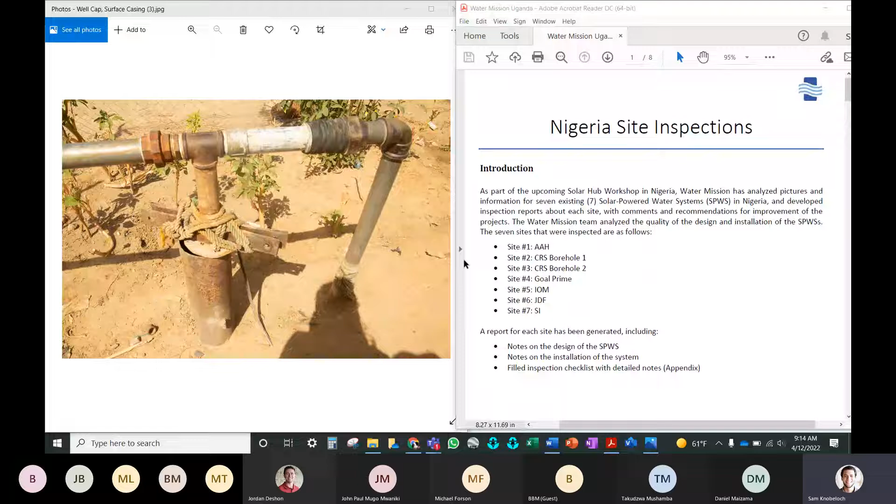Similarly, for doing an assessment by pictures, you can never have too many pictures, but we'll take the pictures that we have and discuss what we see. Please feel free to jump in, to interrupt as I go along. I will not be offended. I would love to hear questions and anything people have to say about what they are seeing.

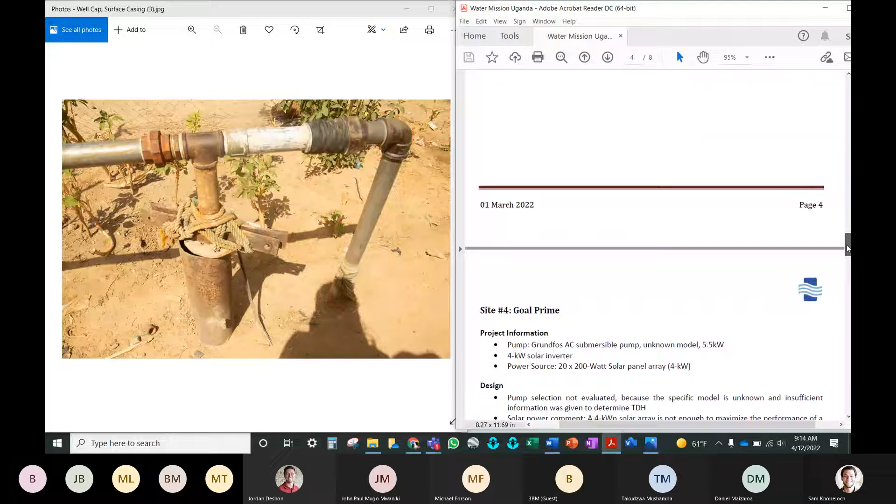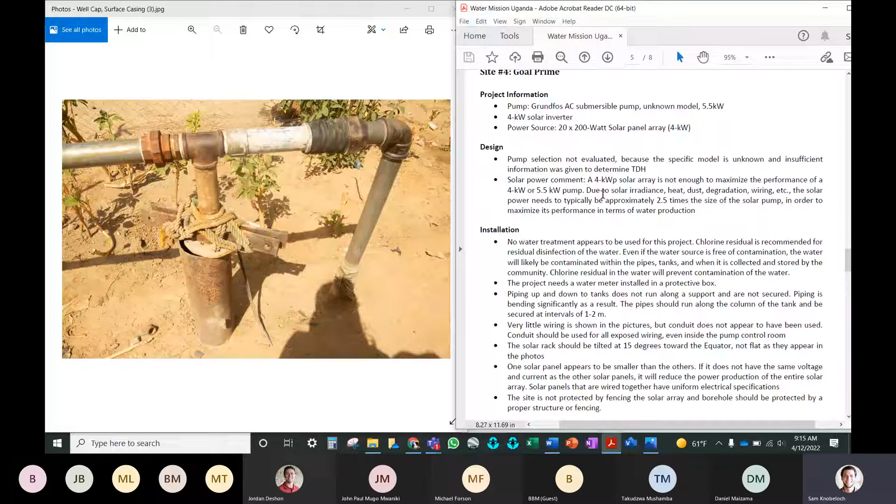So we'll start with site number 4. This is a Goal Prime project. I'll read my notes that I made, and then I'll go through and show you in the pictures. You can see I have my notes here on the right side, and some pictures that I'll go through on the left side of the screen.

The first thing I noticed about this installation is there are no pictures shared of water treatment. So even for water sources of very good quality, it's recommended that

chlorination be done as water treatment. And the reason for this is even if the water is free from contamination in the source, the water will likely be contaminated by pipes, by tanks, or by the people who are collecting the water. Maybe it will touch their hands, their containers. There's no guarantee that everything the water will touch from the time it is extracted to the time it is used will also be clean. In fact, it's likely it will not be clean, and then it can contaminate the water.

But chlorine gives the water a residual protection from contamination, and it's safe to drink, so that if the water touches dirty hands, it will still have some amount of protection to make it safe to drink. So Water Mission recommends chlorination as disinfection and residual for all water system installations to ensure that safety.

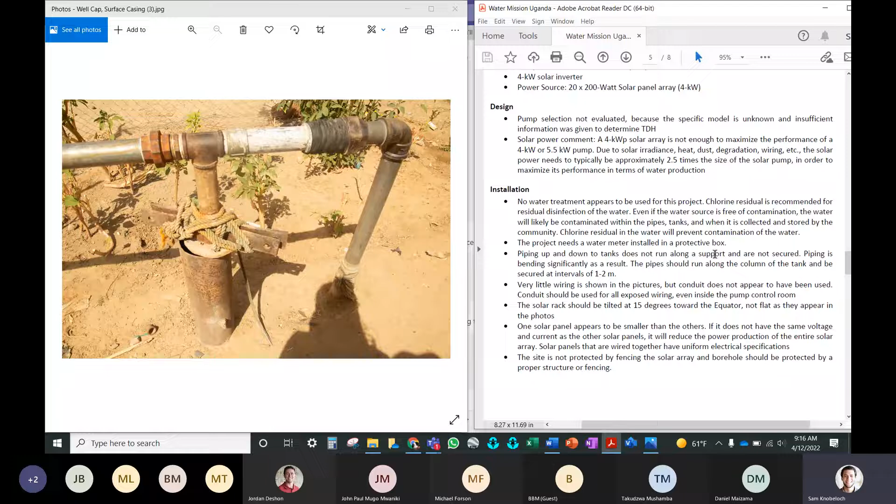This is also a common standard in municipal water systems all across the world for public water to have that residual, some kind of protection from contamination.

So now let's look at the borehole. This is the borehole. You can see the well is here, and the pipe comes up out of the borehole there. So some comments I have for this installation: number one, there should be a water meter installed on the project. It doesn't have to be installed at the borehole. Maybe there's a pump house or near the tank, but a water meter should be installed on the project and be in a protective box.

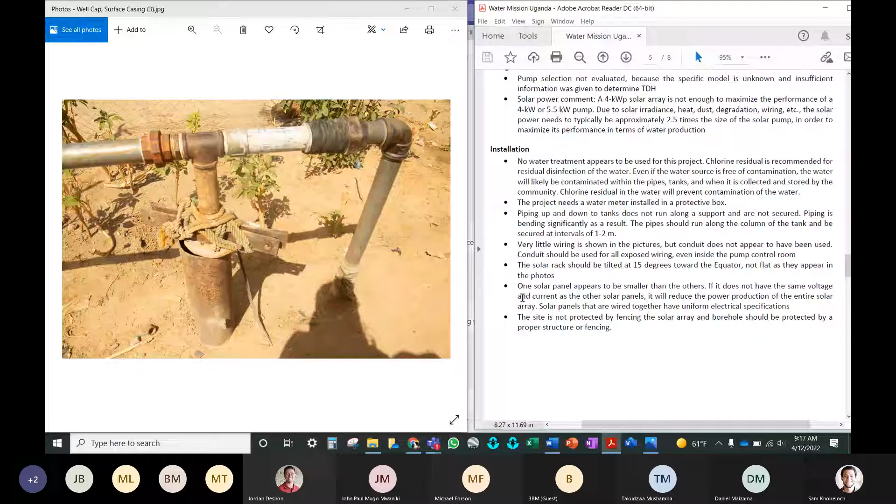Let's go to some more photos. Here we go.

Let's look at the tank tower. One thing I noticed is the piping is not adequately secured. The piping up and down to the tanks does not run along a support and is not strapped to anything. The ideal installation for suspended piping is that it would be against a wall or a tank column or against the tank to provide support, especially if it's plastic piping.

And then it should be strapped with pipe straps or something else to secure it. This would protect it for the long term and give it more durability.

The second thing I would recommend is having some kind of fence around the tank structure. This will reduce the risk of accidental damage to the piping or anything else. It can also prevent children from being able to climb on things where they would also not be safe.

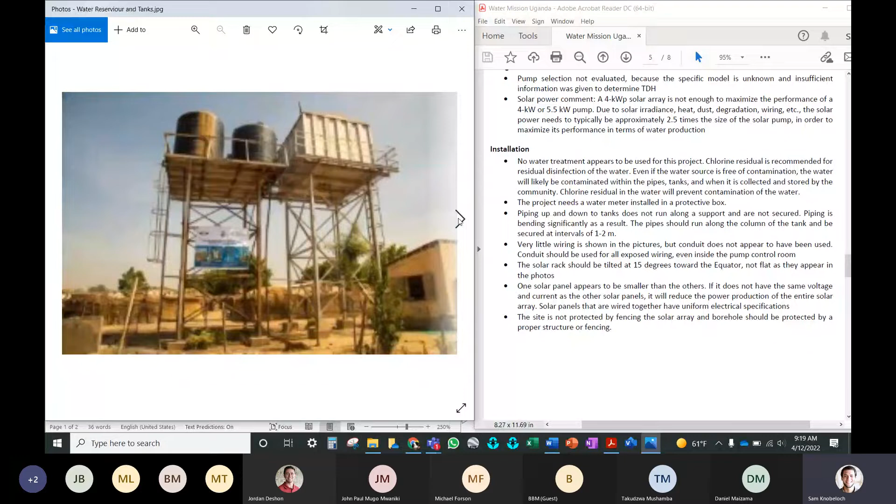Another comment I had about the piping going to the tanks: for the inlet to the tanks, the piping comes up and divides and branches to go to both tanks. The way I would advise this to be done is along the base of the tank tower. The inlet pipe could divide here, branch, and go to the base, then run up the tanks into the inlet - that would also be more secure for the pipe. Basically, the goal is to limit the amount of suspended pipe that is not secured to something or running along some kind of support. The less you have of that, the more secure your pipe system is going to be, and the more you reduce the risk of damage.

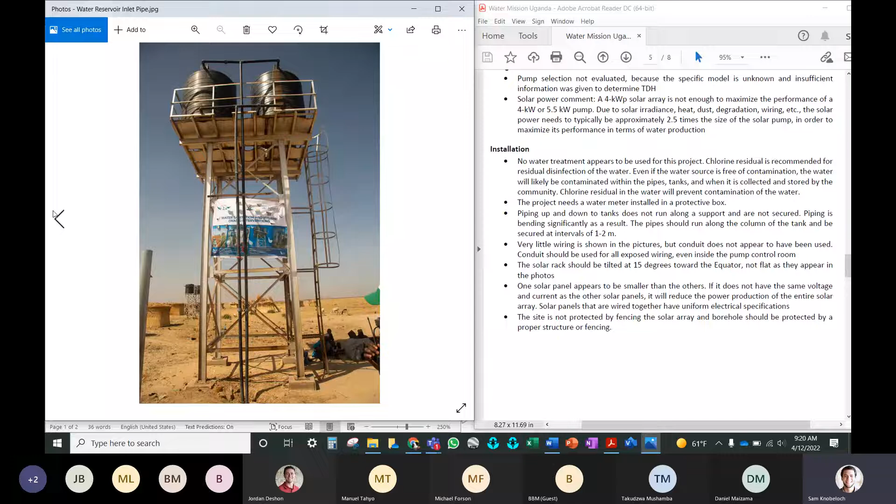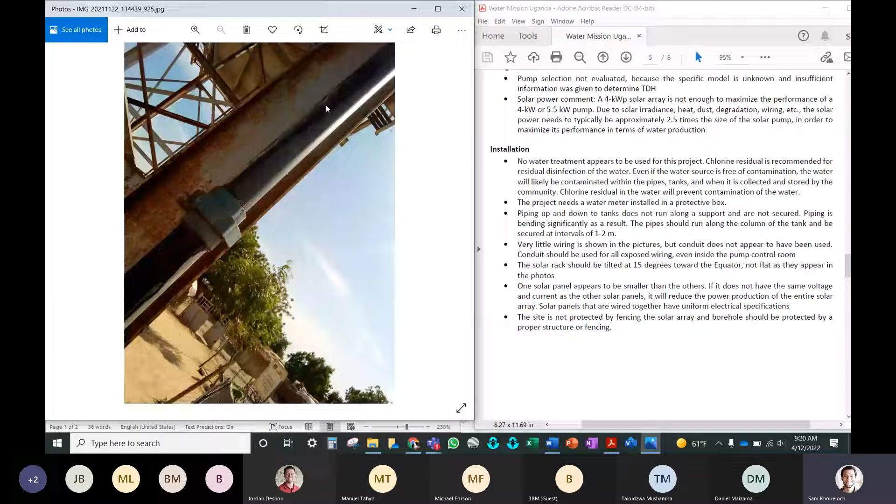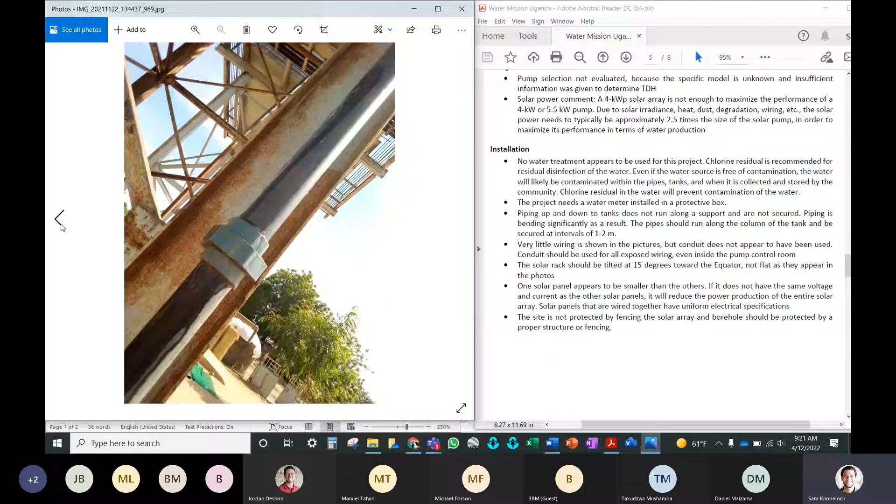Let's look at the solar power and the wiring for the system. You can see here's an example where the pipes do run along a support. That is actually recommended for all the piping, as much as possible, to run along those supports. Even if it requires a few extra elbows, fittings, or additional length of pipe, it's worth it for the protection of the pipe.

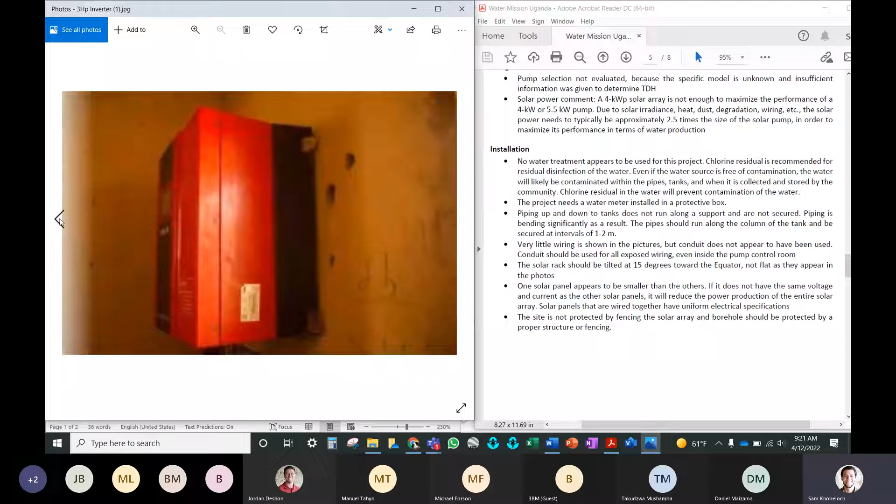Okay, so here we go. I'll go back to the beginning. One thing you can see in these pictures is that the solar array is completely flat.

There are two things to consider when determining the tilt angle of a solar array. One is the location of the project, specifically the latitude, and what will give it the best direct sunlight. So if you are 3 degrees north of the equator, you may want to consider facing the solar array south by 3 degrees to get the most direct sunlight. However, the minimum tilt angle for a solar array that Water Mission recommends is 15 degrees, and the reason for that is for cleaning.

If the solar array is tilted, when there's rainfall, the rain can wash dust off of the solar panels and help them stay clean. If the solar panels are completely flat, despite the fact that that might be a little more efficient for capturing solar power, it can also capture water. Rainwater can pond on top of the array, or it won't wash any dust away because it's too flat. So Water Mission recommends at least a 15-degree tilt.

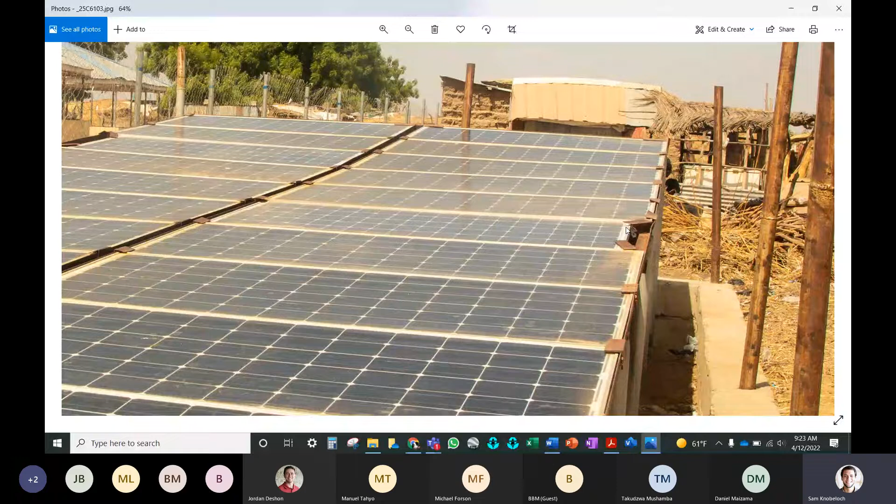Another thing I've noticed about this solar array - I'm gonna zoom in a little bit - is there's one solar panel that is different from the other solar panels. You can see this one is smaller in size, so that indicates it's probably a different model and probably a different amount of power. The reason this is a concern - well, first of all, the details of this specific solar panel weren't shared, so I'm not 100% sure what the electrical specifications are, but it's very important that the solar panels installed and wired together have the same electrical specifications.

If solar panels are wired together in series, they all have to run on the same electrical current. So if you have one large solar panel wired in series with a small solar panel, both solar panels will run with a low current because they have to operate with the same current. If you have 10 large-current solar panels installed in a string with one single small solar panel, it will cause all 11 solar panels to operate with a small current because they all have to match each other's current.

It's the same with voltage. When solar panels are installed in parallel, they will all operate on the low voltage. So basically, you want to avoid having solar panels of different electrical specifications because it will reduce the efficiency of your array. The larger solar panels will be operating at a low amount of power, and you won't get as much solar power from your array.

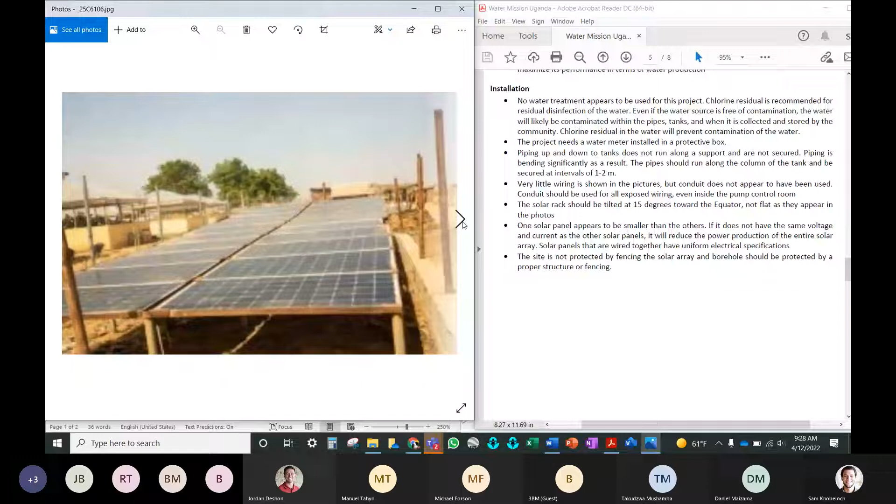So this is the pump control room, or this is the inverter. It appears to be installed in the pump control room. So one thing that would be great to see is pictures of the entire pump control room, so all the wiring can be seen, everything that's installed inside this room can be seen. And then we can analyze that.

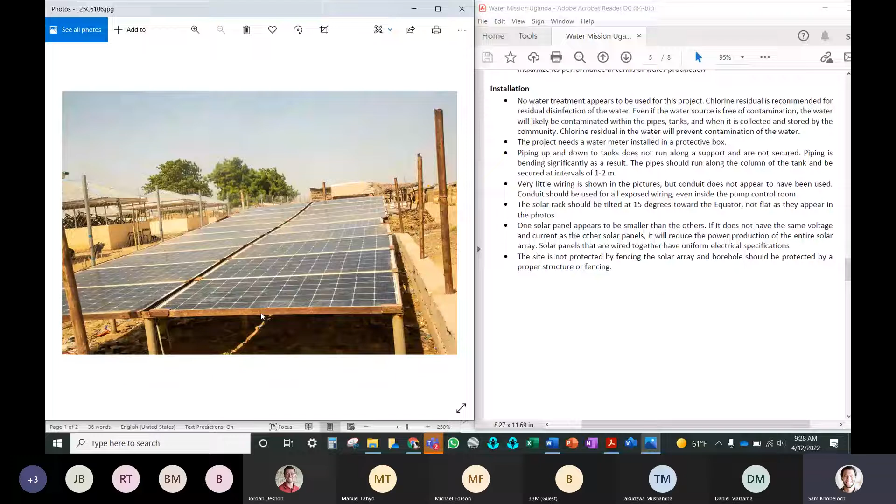But one thing I'm getting from these pictures is, although you can't see much wiring, it doesn't appear to be installed in conduit. Also, even if you go back to the solar rack, you can see some wiring here. So Water Mission recommends that all pump cable, all solar cable be installed in conduit, and the conduit should be secured to a support or secured to the wall, something like that.

This protects from water damage, it protects from insects, it protects from someone tampering with the wiring. And it helps keep people safe, especially those who may not know much about electrical power and how to stay safe around it. So it protects the equipment as well.

Even when electrical equipment is installed inside a room, it's best to protect with conduit as much as possible.

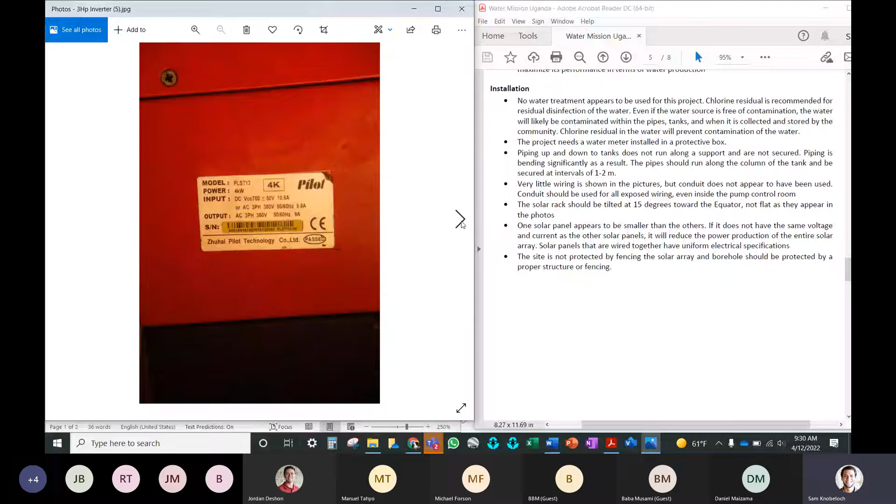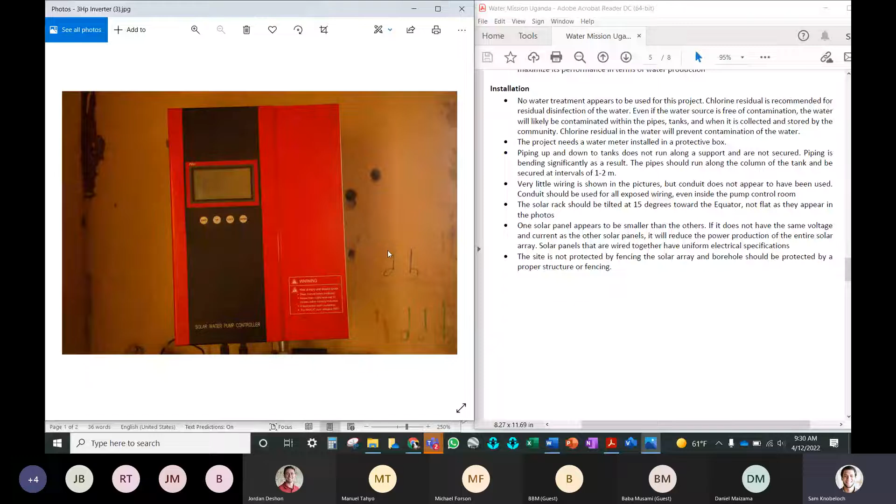Another comment I'll make is it is recommended that an electrical room like this be used for installing all of the electrical controls on a water system. It protects from water, insects, all that. It keeps the equipment protected, and the more protected the equipment is, the longer it will last. And hopefully by the end, we'll get an opportunity to look at some installations that show the full recommendation for protecting electrical equipment that we make.

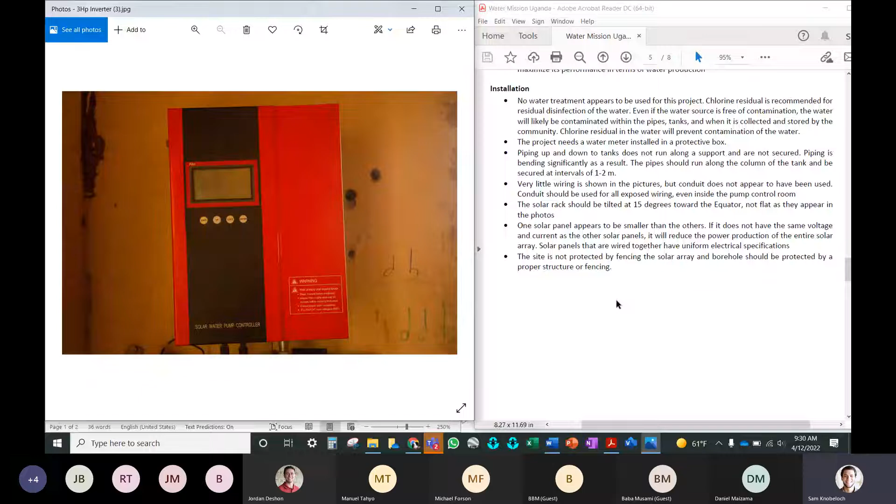So next, I want to move on to another project and look at more pictures. But before I move on, does anybody have any questions or comments they would like to share? There is one question in the chat box. Can you see it, please?

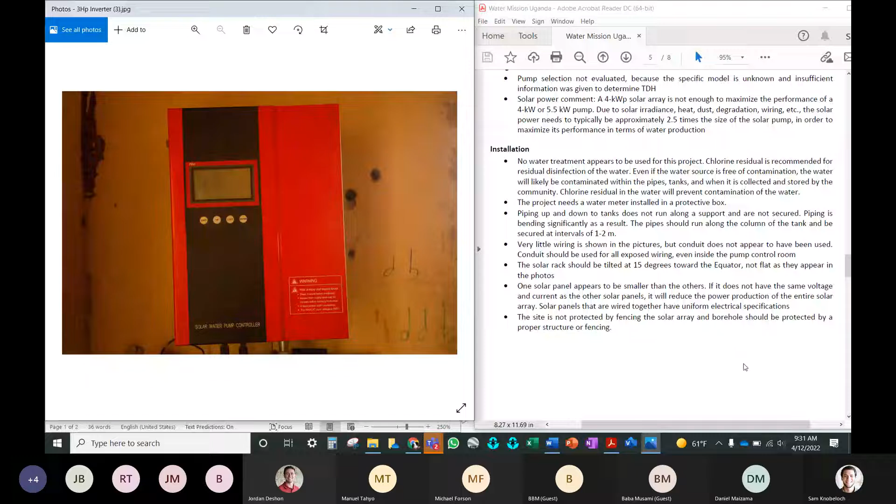Yes. So, will the fence posts cast a shadow on the solar panels? It's a great question, Jordan. Let's take a look at the solar panels. Yes, so depending on the time of day, it looks like it's quite possible that these fence posts would cast a shadow on the solar panels. I don't know which direction the sun is rising from.

It looks like there's a slight tilt to this. At the back, it looks raised, and at the front, it looks lower. So let's assume that this is the south side of the solar array, so that would be the ideal direction to tilt the solar array. Then in the morning, as the sun rises in the east, that would be the right side of the picture. These poles could shade the solar panels, and in the evening, as the sun is setting in the west, these poles could shade the panels, and that would cause reduced production.

So I think it is likely the sun is very high in the sky, so during the day I wouldn't expect the north and south poles to shade, but regardless, anytime a solar panel installation is done, it should be clear from any possible shading obstruction. Trees, other structures, fencing, all that should be constructed in a way that it does not shade the solar panels. And during installation, it should be observed while things are being constructed. You should observe to make sure that no shadows are being cast. Tree branches can be trimmed, but if structures cannot be trimmed or moved, that needs to be adequately planned.

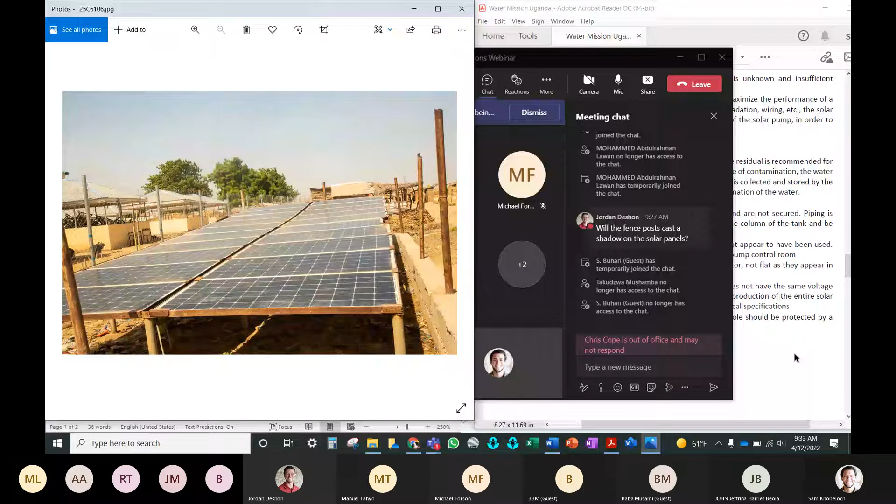Hello? Yes. Yeah, for example, like this one has one of the solar panels different. Yes, assuming all the solars are mono and then you got a replacement of poly, is it okay?

That's a great question. I'm not extremely familiar with all the differences between mono and polycrystalline. One difference I know is that I believe monocrystalline is less prone to deterioration over time. But I'm not extremely familiar with the difference. The most important thing is that the current and the voltage of the panels be matched or very similar. But I would have to get back to you on whether it really matters if it's mono or polycrystalline. Jordan or Daniel, do you have any, or Manuel, do you have any insight for that?

No, I think we can try to investigate and then respond back with that question. Great, yeah, we'll make a note of that.

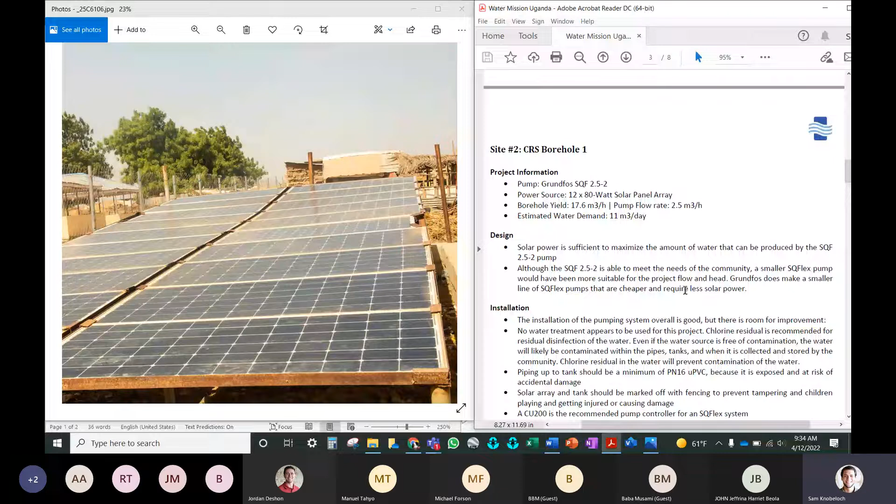Absolutely. Okay, so let's move on to the next site I want to talk about. This is a CRS project, called CRS Borehole 2. Let me pull up my notes and the pictures for this project.

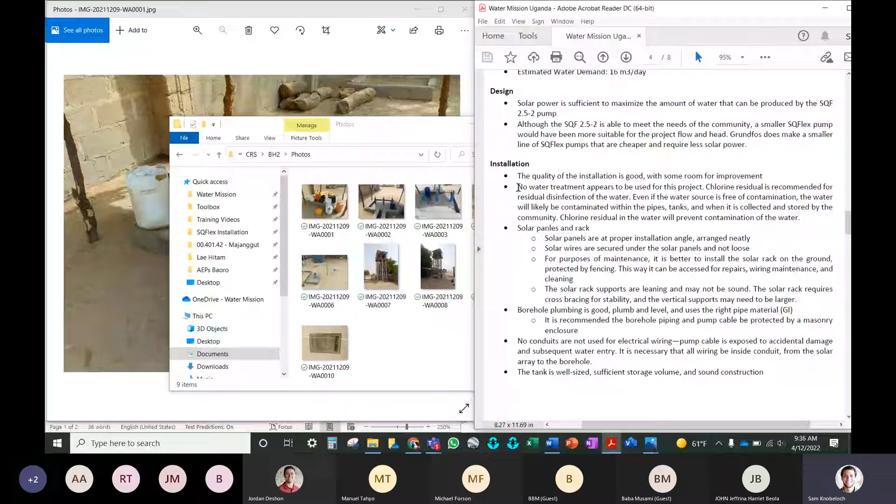Okay, so the overall quality of this installation was good, but there are some areas for improvement, so we'll talk about that. The first comment, at least based on the pictures shared, is that there was no water treatment installed on this project. Often borehole water quality is very good, but we always recommend some form of residual prevention from contamination, and chlorine is the simplest, easily accessed solution for that.

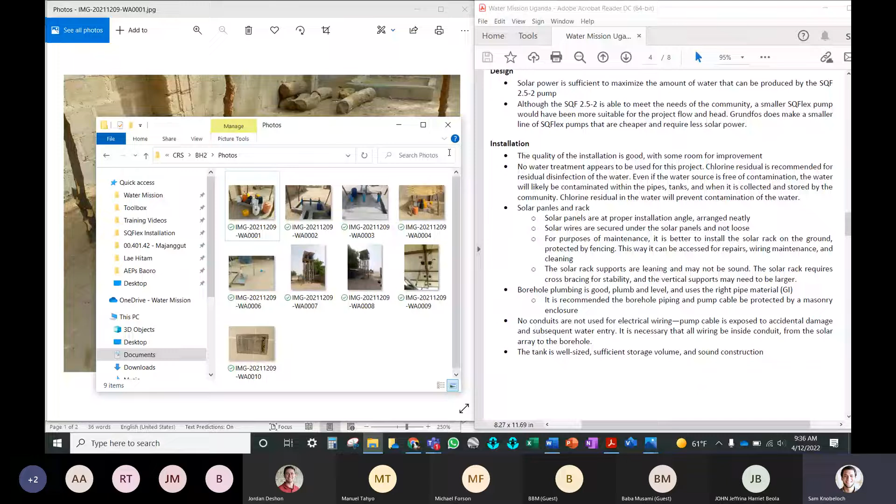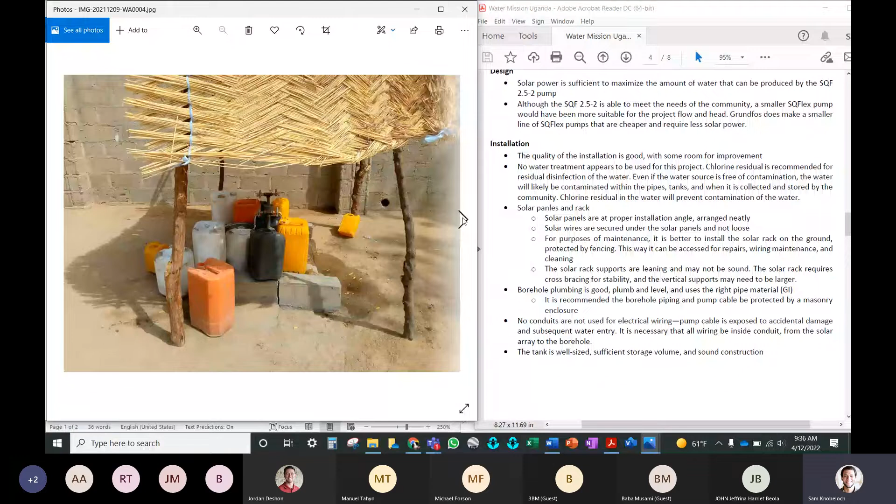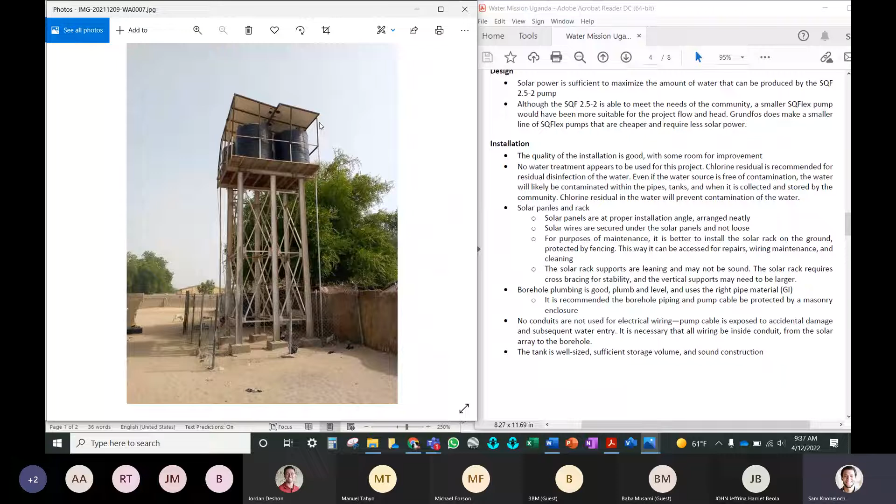Let's open up some pictures. First thing I'll talk about is the solar installation. As you can see, the solar panels are at a proper angle of installation. It's hard to know the exact angle, but it may be a little too shallow for good cleaning by rainfall.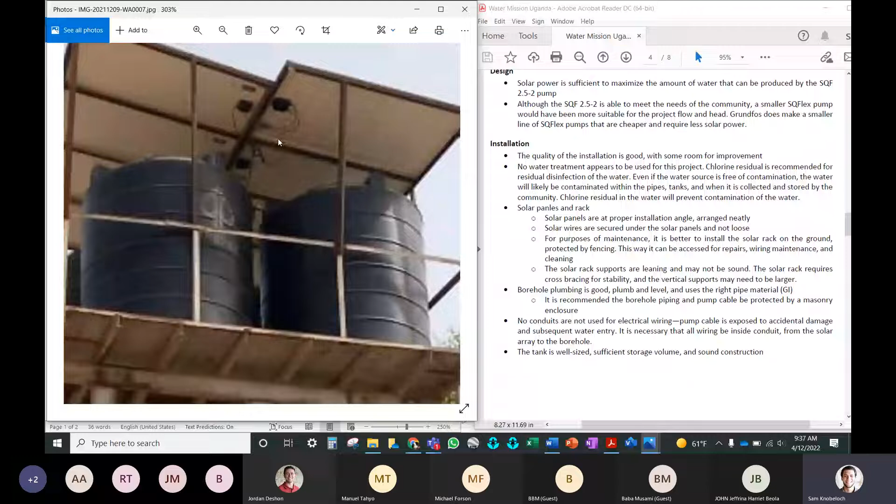Another thing we see here is that the wiring for the solar panels is secured neatly underneath the panels. They're not hanging loose, which is good. I know I talked about all wiring being inside conduit - that excludes the solar wiring immediately under the panels. When you have these solar panels wired individually, the best thing to do is tie them with zip ties or cable ties, keeping them secure to the bottom of the rack. Then when they come together, or begin to run toward the electrical room, they should enter conduit before coming out from under the solar rack. So the conduit should start from underneath the solar rack and run wherever it needs to go.

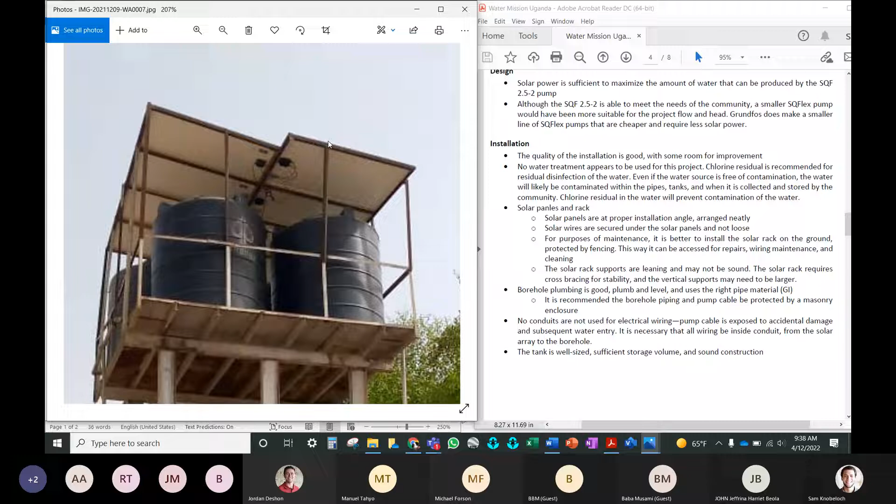Some areas of improvement for the solar rack: number one, the supports - you can see they're not all perfectly straight. They're welded off the railing from the tank support, so the supports don't look perfectly stable or quite stable. The most important way to improve the solar rack support structurally would be to add cross bracing in between all these vertical supports. That would make the rack much more secure and structurally sound. Wind blowing can cause it to sway, and cross bracing would prevent that swaying.

The cross-bracing may be sufficient to make it secure, but I also might prefer having larger vertical members for these solar arrays. The best thing would be, if it's going to be on top of the tower, for the vertical support to go from the solar rack down to the tower base rather than being connected to the railing, just to make it sound.

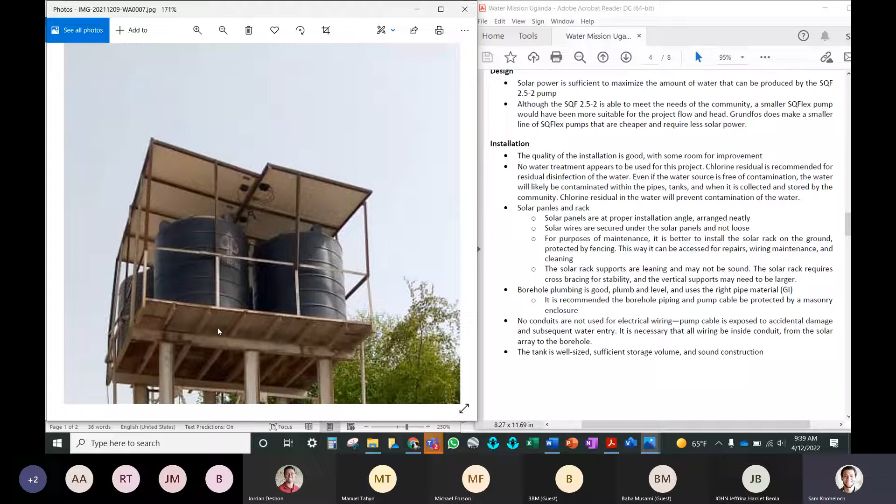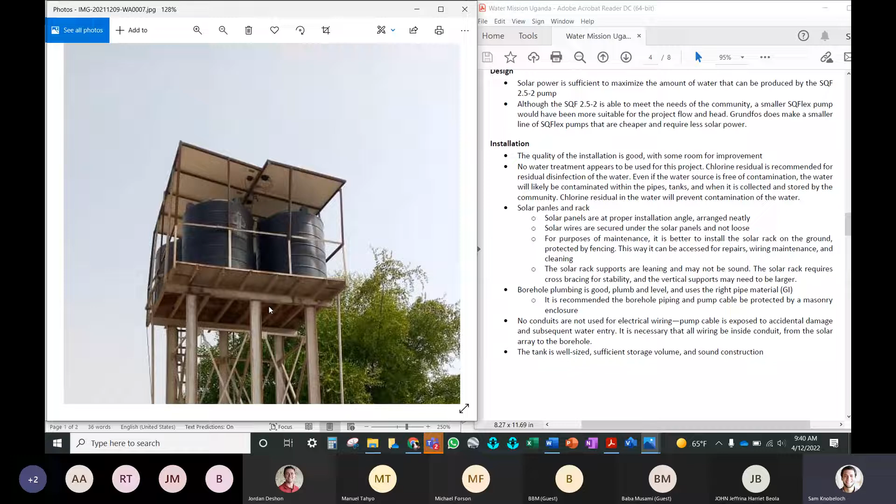The other comment I would have is that it's best to install solar racks on the ground or on the roof of a structure where they can be easily accessed. Because these are installed up high, even if someone comes up to the tank platform, it is still very tall for them to access. Also, the tanks may prevent access to fix wiring or do any kind of repairs or maintenance, and especially cleaning.

Imagine being the person who has to go up and clean the solar panels on top of this tower - there's really no place to stand, no place to put a ladder at the base to get up there. That's why it'd be preferred to install on the ground or on the roof of something where it's safe to stand or put a ladder to easily access the solar panels. So that's something to consider: can my solar panels be safely accessed for cleaning and repairs in my installation? You can use your best judgment for that as well.

So those are my comments on the electrical installation. Let me talk more about conduit - let me see if I can find a good picture for that.

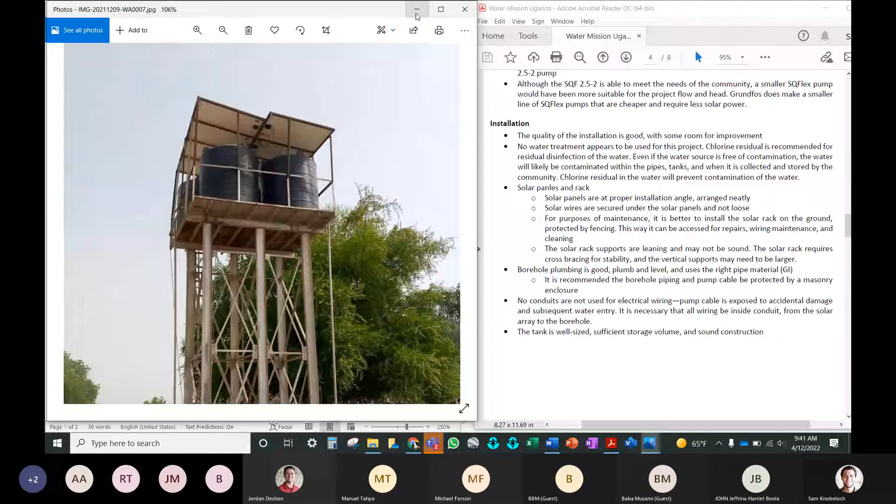So this is the borehole. As you can see, the electrical wire is not protected in any kind of conduit.

Again, we recommend that conduit be installed, and ideally you would have a structure around the borehole. If there's any plastic pipe or plastic conduit or wiring exposed, a small masonry structure can be constructed around the borehole to protect that wiring, the conduit, the plastic pipe.

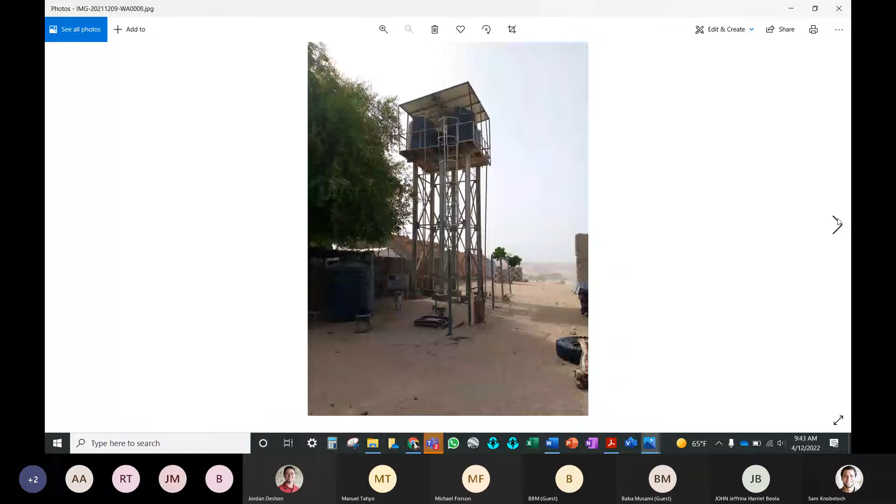I think, let's see if there's a close picture of it. So as you can see, the pipes running up and down from the tank are also suspended, not secured to a support. Ideally, it would be secured to a support.

I've seen where the pipe is strapped to the vertical support of a tank tower, and then a hole is made in the platform so the pipe can come up and go to the tanks rather than doing elbows over to the outside, but both are acceptable. The key is to have the pipes strapped along supports for durability.

And it also appears that this is the pump cable coming down from the solar panels. There you can see a small cable here, this thin line looks like the pump cable. It's very important that it be strapped in conduit, and then that conduit be strapped to a vertical support.

So the key thing to remember is that all wiring should be in conduit and not exposed to damage by animals, by insects, by lizards, or by any other accident that may happen.

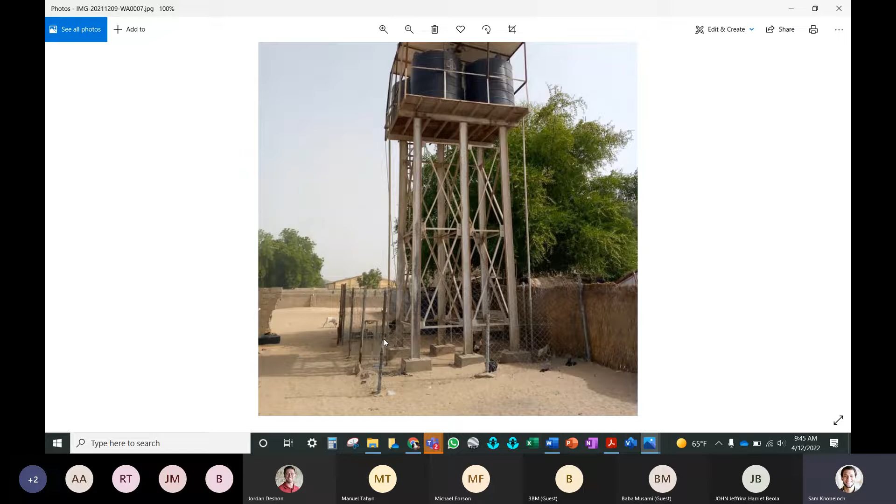Let's see, some positives. The water system is installed within fencing, which is good to protect the project, and borehole piping is very straight. The horizontal runs are level and the vertical runs are plumb, and we have straight 90-degree turns. Those are all good things.

The use of metal piping when it's exposed is good. So it looks generally, it has a look of neatness to it, although there is some exposed cable.

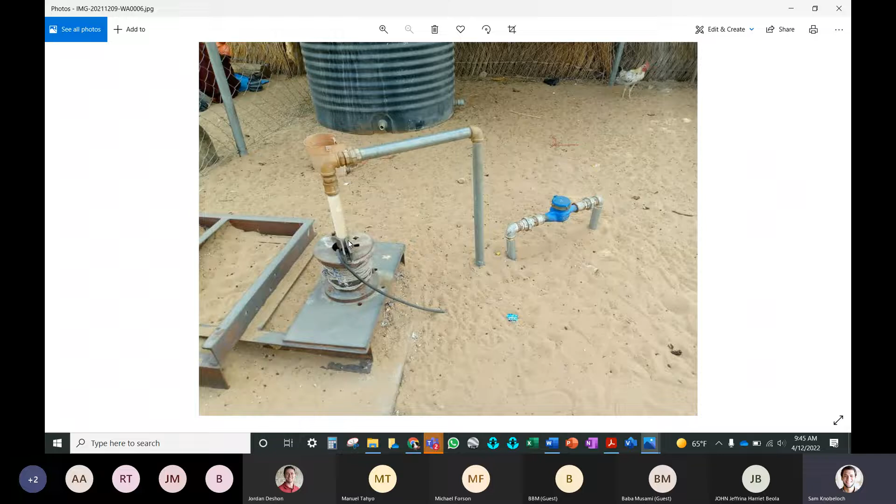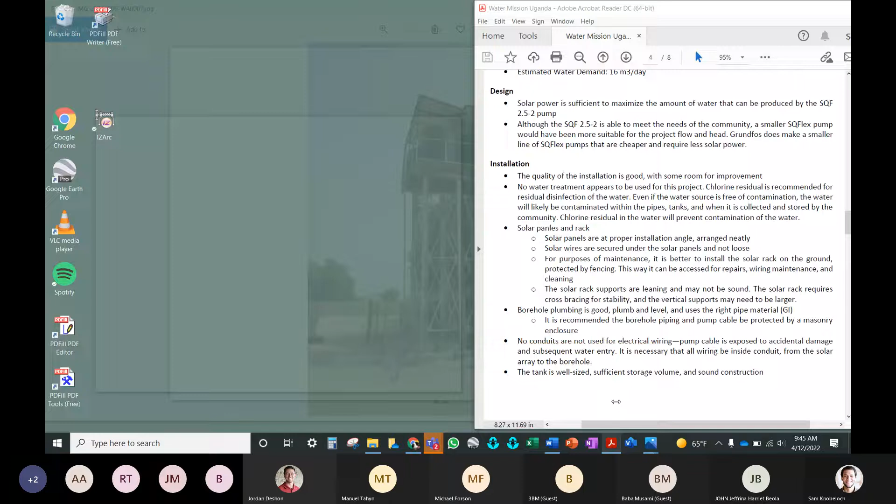Any comments about this system or any questions? One thing I'll say is we haven't seen, this project doesn't show where the pump control switch is. So that is something, I'm not sure where that is and how the wiring is done there, but we'll look at some other examples to talk about that.

Okay, so I'll move on to the next water system. We have about 15 minutes, so maybe we can do one more water system, and then we try to get through that quickly. And then if there's time, we can look at a Water Mission installation and talk about some things as well.

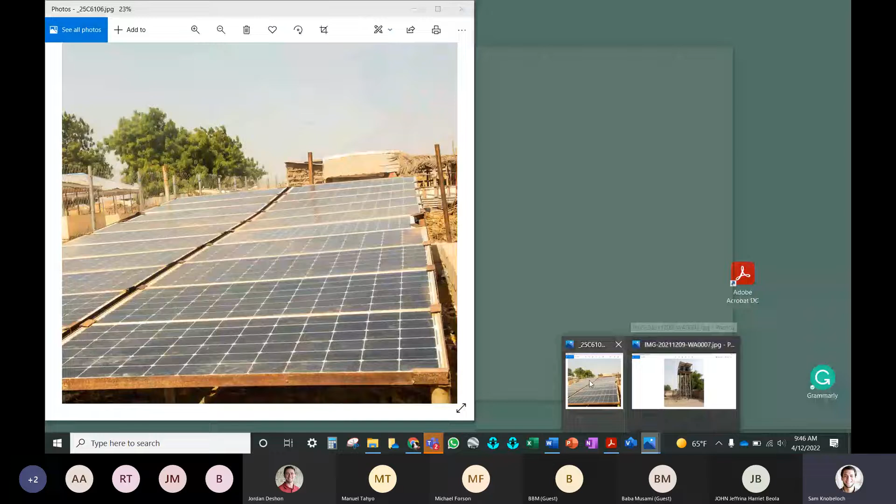So let's see. The next borehole I want to show is CRS Borehole 1. Photos.

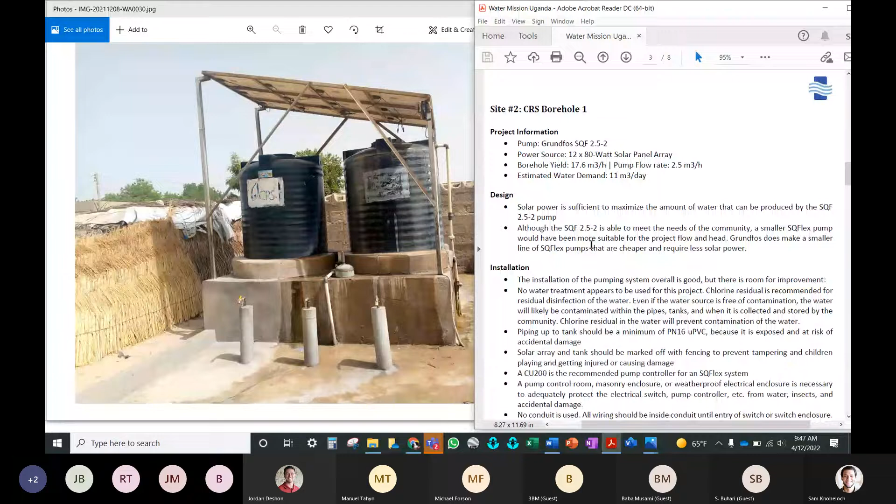So again, another comment is about water treatment. I didn't see any water treatment for this project either. But we've discussed that.

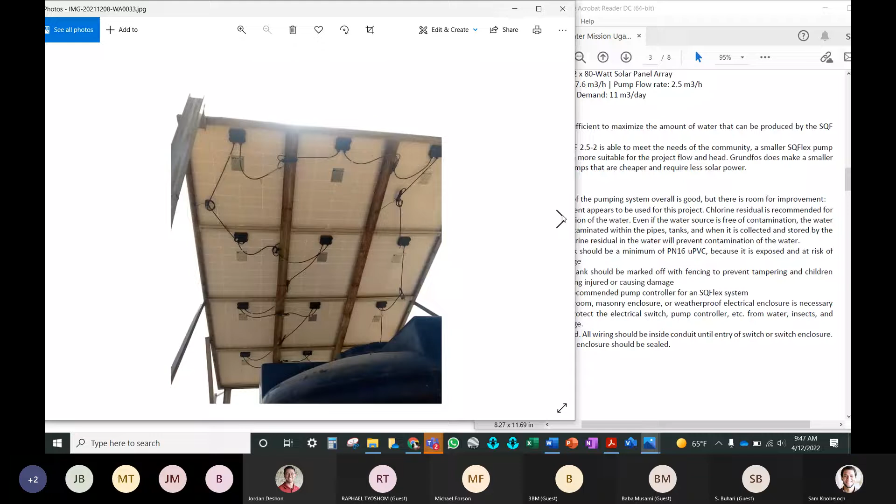So this is the project. This is where most of the components of the solar powered water system are contained. And I think this is the location of the borehole there.

So we'll talk about the electrical installation first.

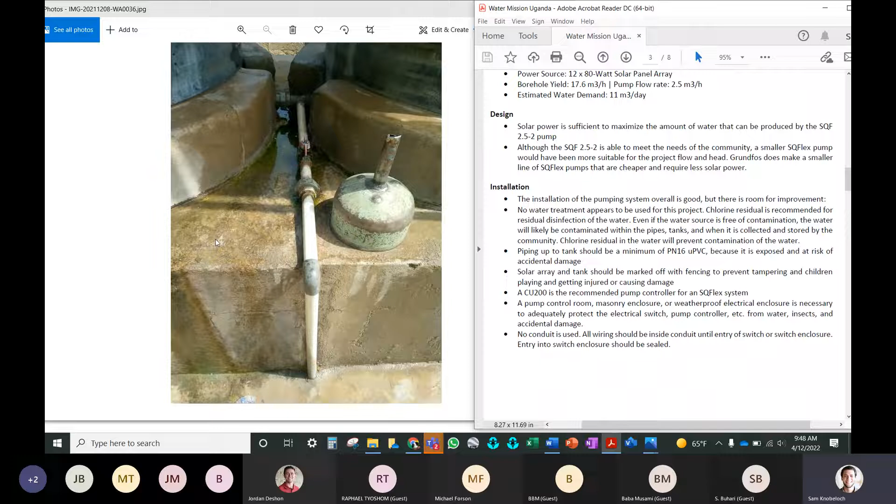Some good things. You can see again, the wiring is secure underneath the solar panels. But once it is wired together, it should go into conduit.

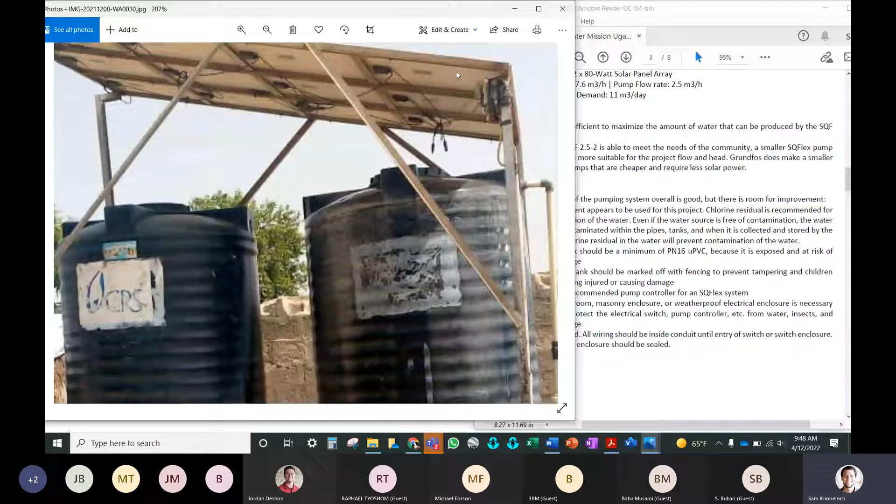The solar rack has cross bracing, and it is at the footing. It is encased in concrete, so it has more stability than the previous solar rack because of the cross bracing and the way it is tied into the ground here with concrete.

Ideally, this area, it was hard to see, but this area should be fenced in so that people cannot just access the solar array, the wiring, the switch. All this is exposed, and you can see there are taps here. So I'm assuming this area is open to the public, which means the solar component and the tanks ought to be fenced off just to keep things protected.

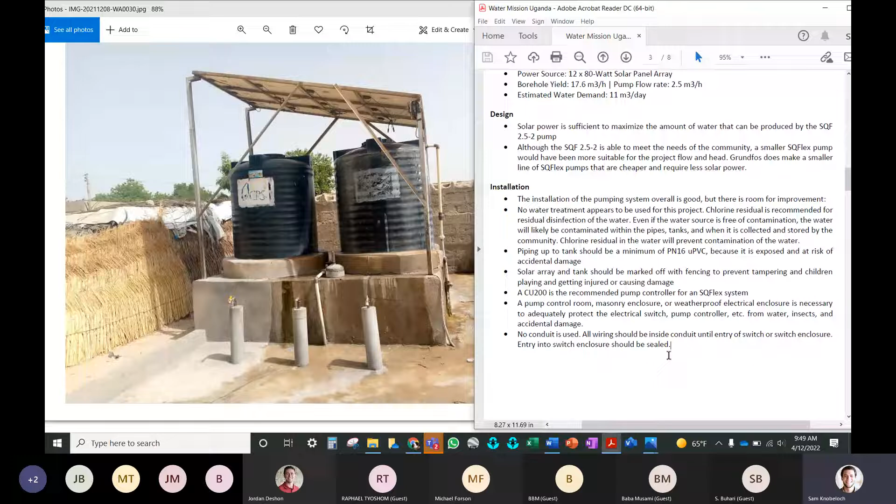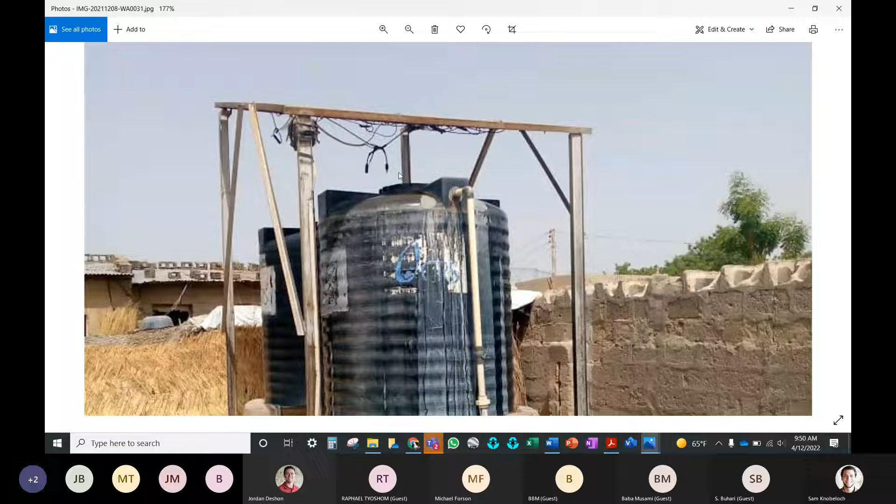So let's look at the electrical switch. Actually, from this angle, you can see that this might be a wire splice or something. You can see where it's hanging down a little bit. So ideally, that could be improved, more secured.

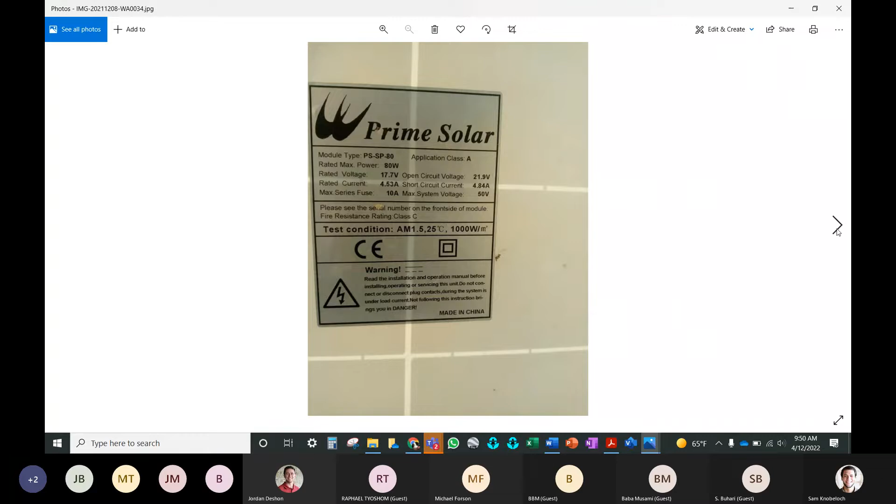Okay, so here's the power switch for the pump. The best way to install the power switch would be inside some kind of electrical room or a small masonry enclosure with a door so that it is protected from outside damage.

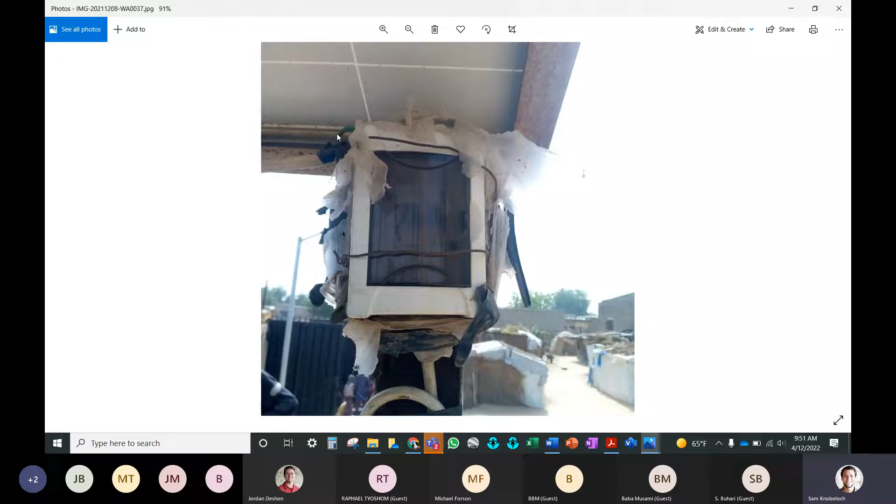A rock could hit this, or over time it's exposed to the weather. I'm not sure if it's sealed from water, so when rain hits the outside, moisture could enter. There's no conduit going into the entry, so it doesn't appear sealed. You can see an exposed wire here. The copper isn't exposed, which would really be a concern, but even this opens up the system to potential damage.

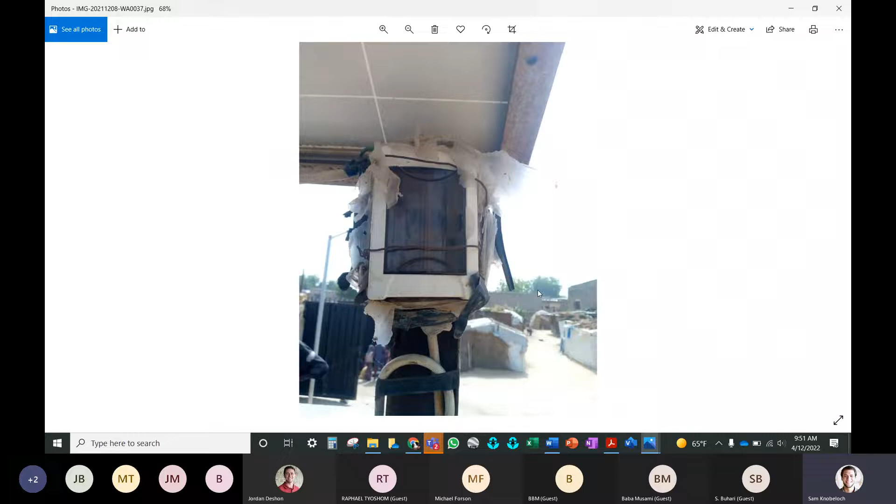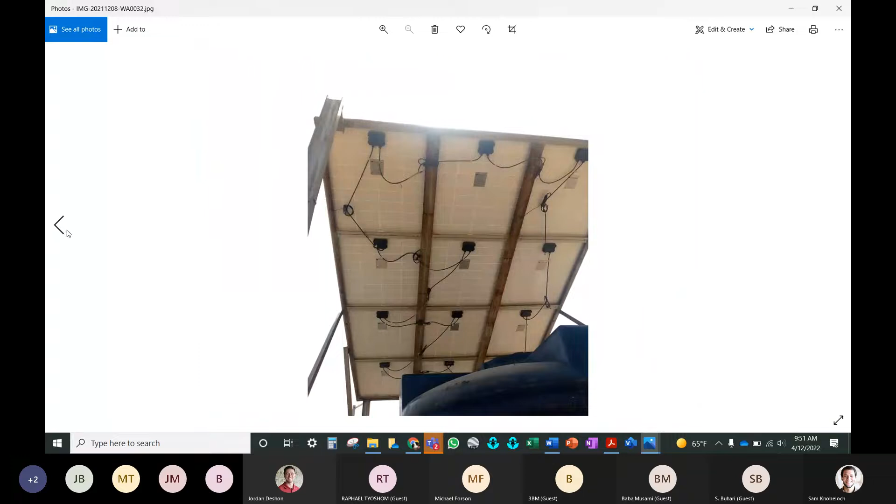All wire splices and wire connections - let's see where we can see that connection. It looks like this connection may be a splice or something. All wire splices or any kind of connection should be protected somehow.

Not with just electrical tape or even just heat shrink, but it's best for it to also be inside conduit, and even inside the electrical control room.

Of course, if wires are joined at the solar array, then at the very least they should be inside conduit and done with a waterproof splice, either by a proper heat shrink seal, or there's also what is called a waterproof splice kit, where an outer coating seals the splice after it's made so water cannot enter. And then that should be protected inside conduit.

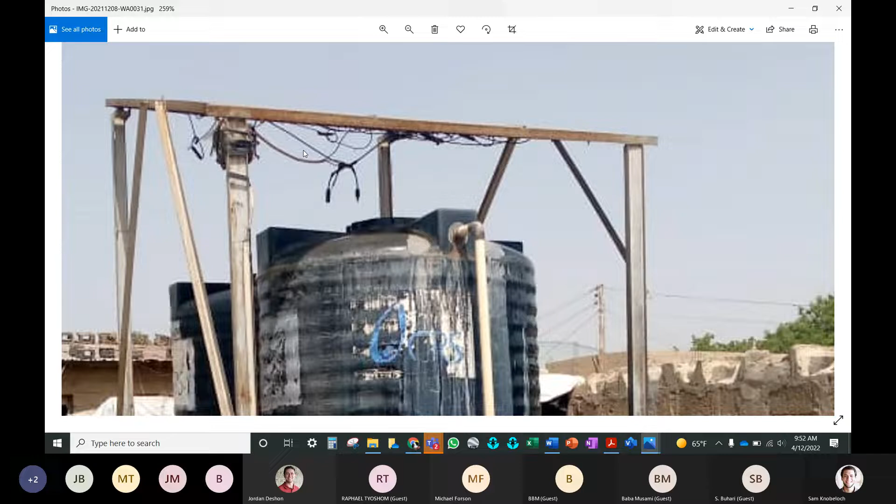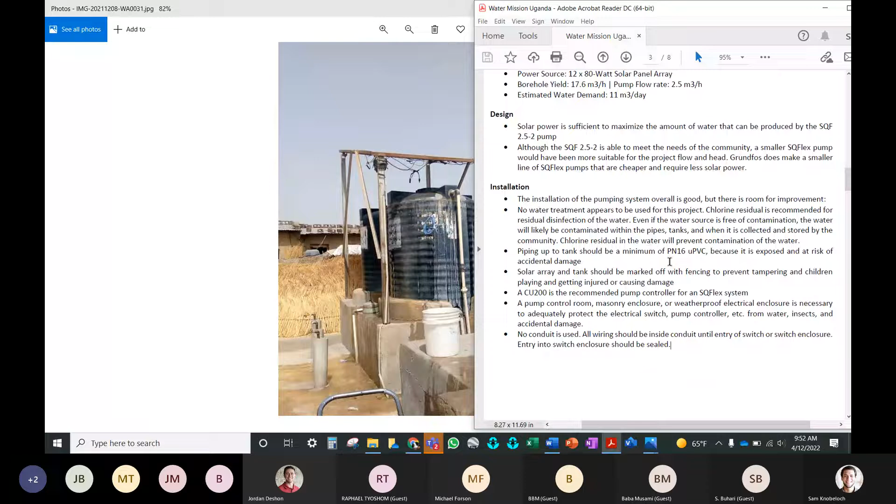The recommended switch for this project, a Grundfos SQ Flex pump, would be the CU200. Water Mission recommends that all standard SQ Flex pumps be installed with the CU200. It gives a lot of information about the way the pump is running.

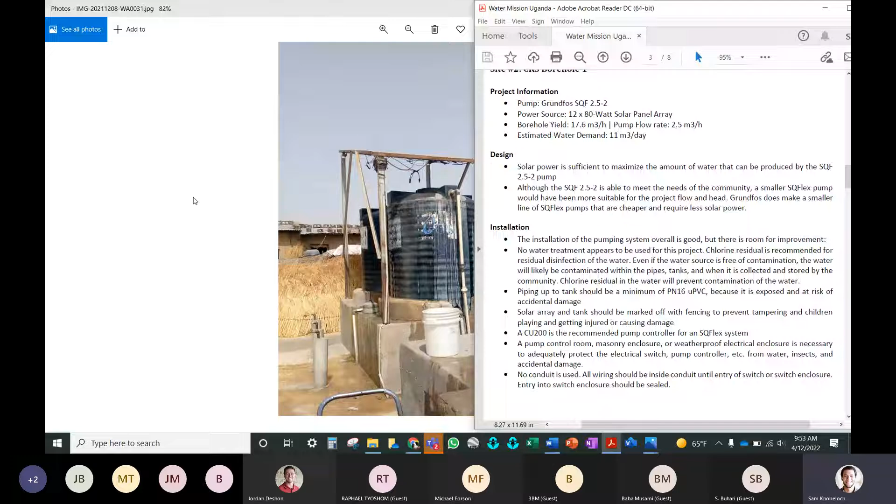So it's better than just controlling with an on-off switch. You can install a tank level switch, see error codes if the pump shuts off, and various things like that. It's relatively inexpensive compared to the cost of the pump - maybe about 10% of the cost of an SQ Flex pump. So for an additional 10%, you get a lot of value.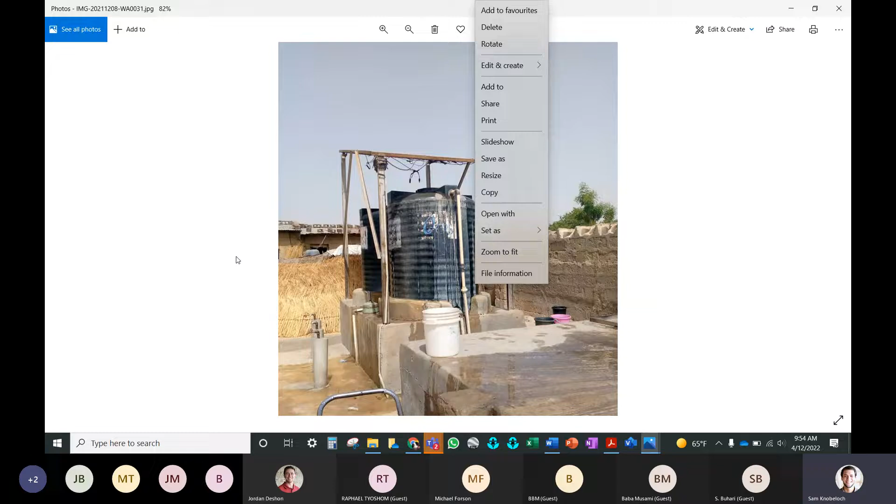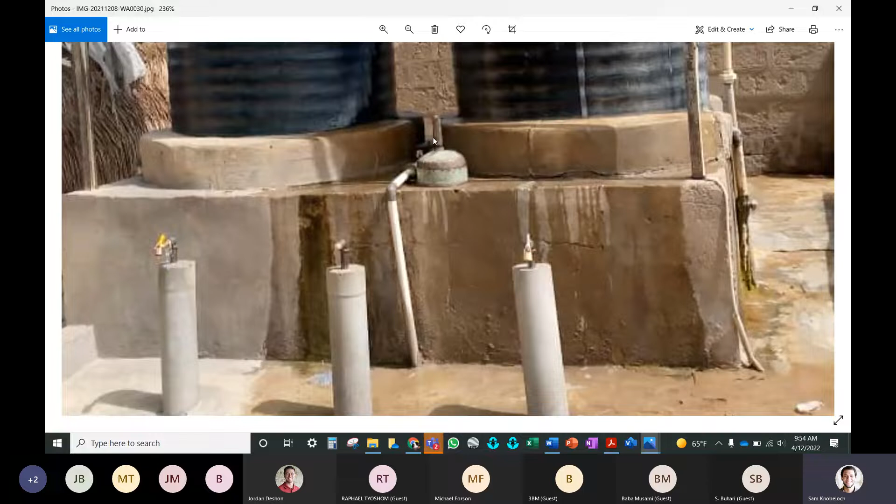Then finally, the piping. You can see some good things about the piping - almost all of it runs along something to help it be secure and not just open and unsupported. You can see here it runs along the side of the tank wall before it enters. Here, the piping runs up the tank, up the wall, across the floor of the base, and up this support. That is good.

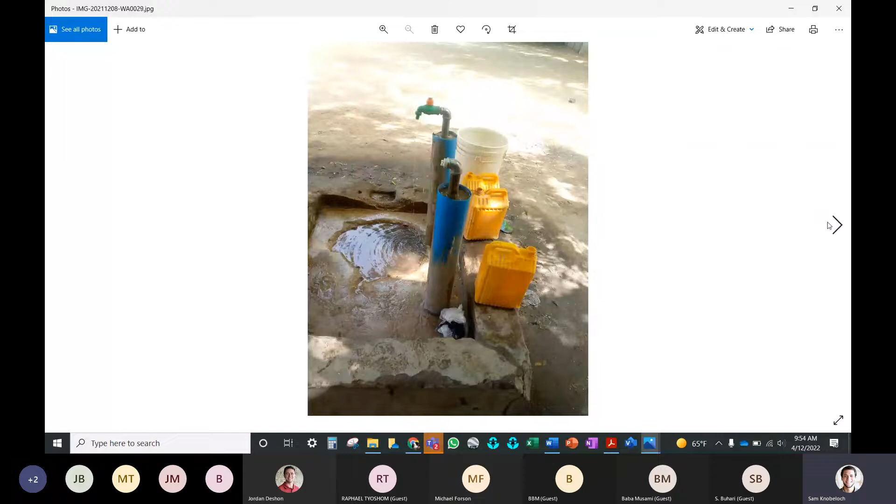The way I would improve that is to add pipe straps. I wouldn't add pipe straps to the tank itself - you don't want to make a hole in the tank - but add pipe straps where it is against the concrete. And then also the valves - we recommend the valves be installed in a valve box to prevent them from damage that would cause leaks.

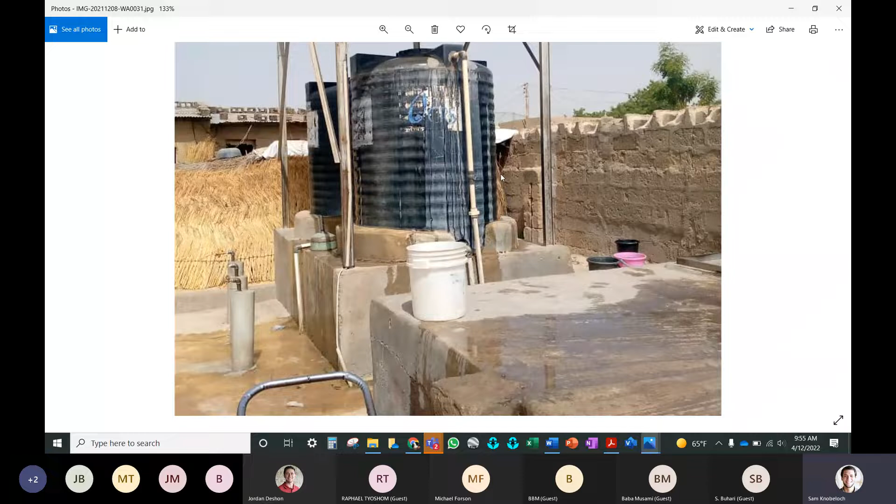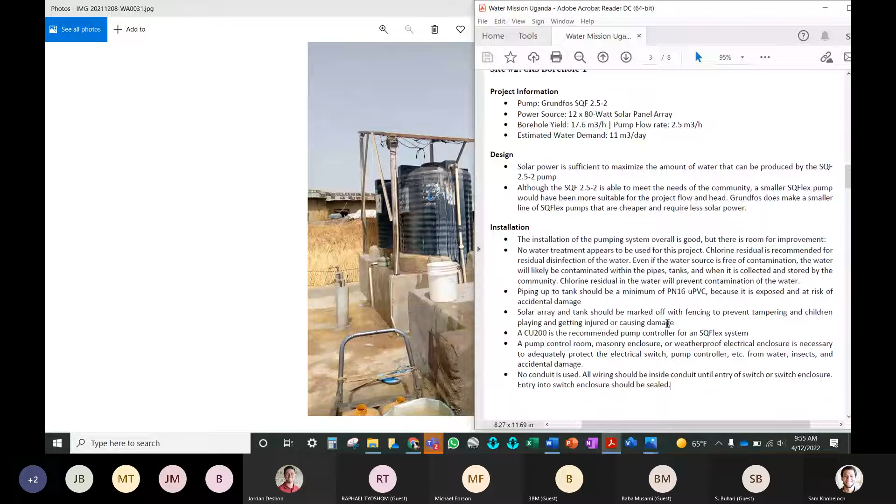Okay Sam, my question is, you mentioned that CU200 is the recommended control box for the SQFlex. But I'm seeing various people using just a control box or on and off switch. Is there any short-term or long-term effect of that?

That's a great question. So it does depend on the switch used. Grundfos has specifications that need to be met for an on-off switch for their pump, so you would need to make sure it meets the specifications. But there is no risk of damage or anything like that. As long as the on-off switch is properly rated, then it's an adequate switch for operating the pump, and there's not a risk of damage.

But I think the CU200 adds some extra benefits that we recommend as valuable. Of course, whoever is the project manager or engineer on the project can make that final decision, but it would be my recommendation because of the value you get, the information that a CU200 can show you about the pump while it's running, I think is valuable.

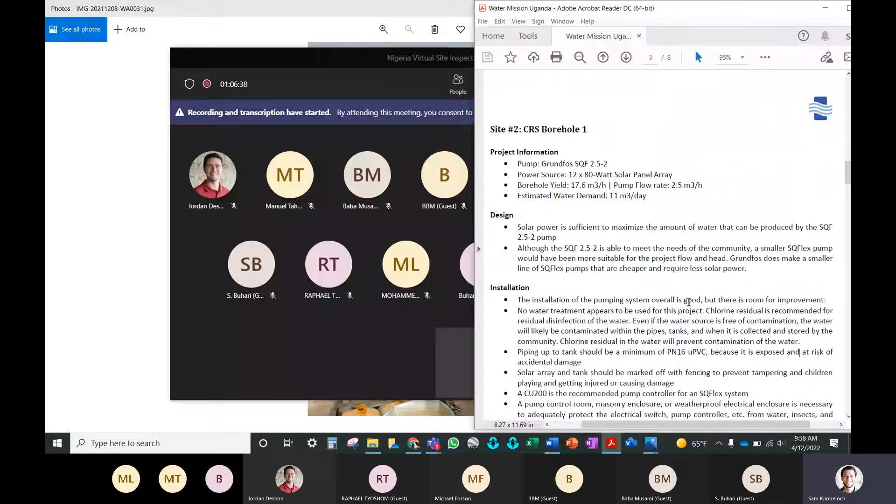That was the last water system I really needed to get through, I think, to show everything, show the main points that I looked through. But there's a lot more aspects to discuss. I think solar powered water systems, there's a lot of material to be discussed in general, so we can never run out of things to discuss on future webinars.

I think we can begin to wrap up, but I'd like to hear from John Paul or others if they believe this was a helpful exercise, if we should plan to do it again in the near future. If there are other things you would like to discuss that we didn't include in the scope of this meeting before we close.

There'll be plenty of other opportunities to give feedback. If no one has immediate feedback, that's fine.

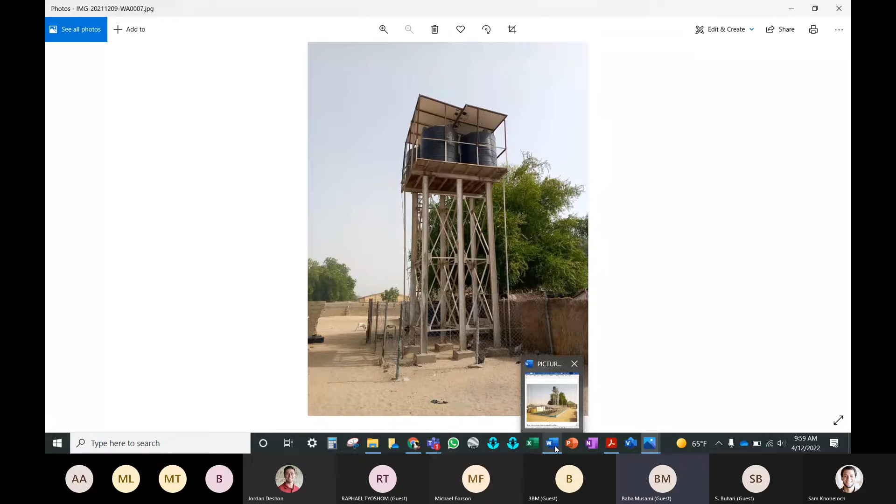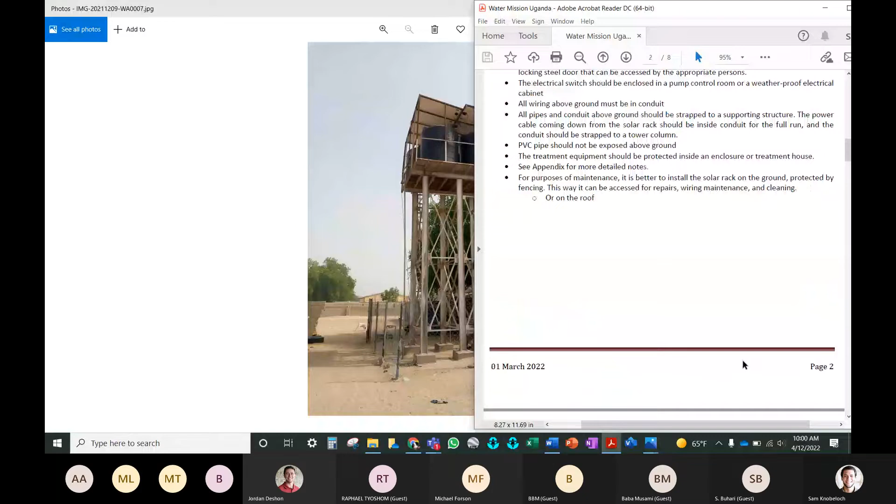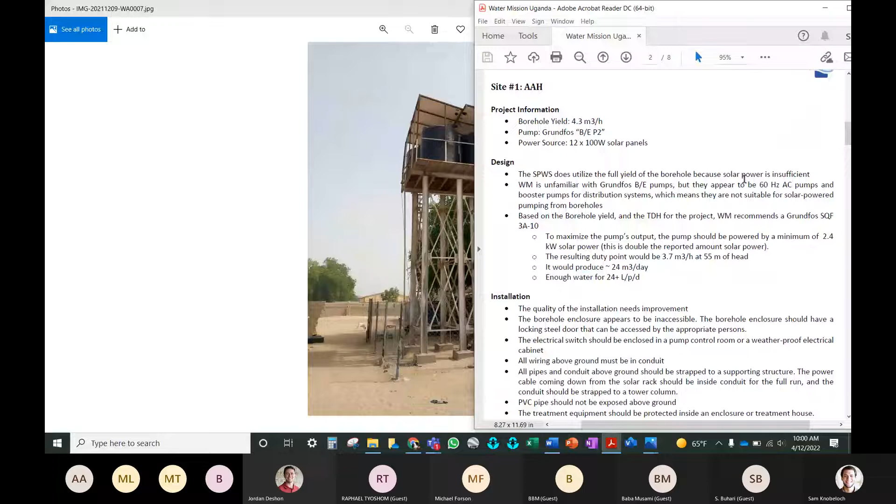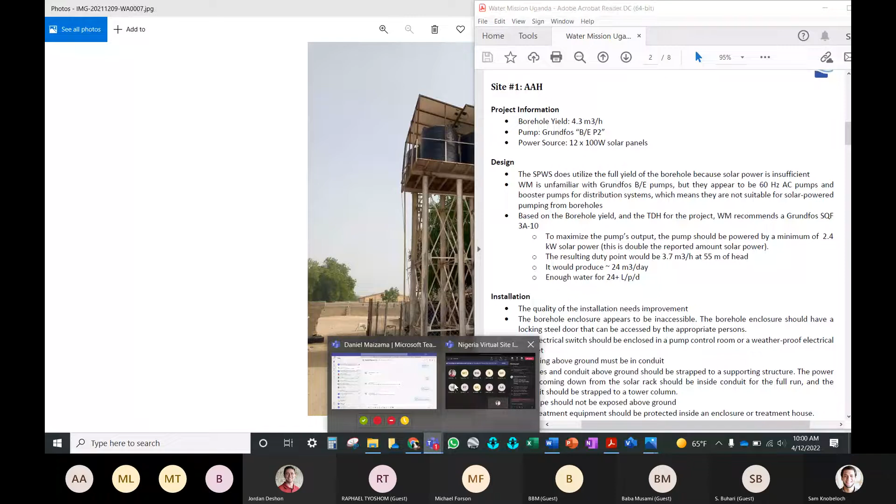Yeah, that's a great comment. Like I said, there are so many aspects to solar powered water systems. There's design, there's installation. We can look at existing installations as positive examples. We can look at things that need to be improved, all that. Is there another comment? No, from my side.

Another thing that can be looked at, we can look at some Water Mission example installations as well, and talk about the different standards we have in our own installations too in the future. So all those are ideas. Basically, I just want to communicate that Water Mission is here to support Nigeria, and whatever you feel would best help you learn and would best support you to do excellent installations, we would love to offer our help.

Does anyone else have more comments? Maybe Amadou, I see you're unmuted. I didn't know if you have a comment.

No, I think for me, I feel like it's timely, and for us, we are open to such kind of enlightenment, you know, to improve what we are doing. Even though these are things that we already know that it's not supposed to be like that, but sometimes we overlook it because we just want to achieve our targets and report to donors. So I think having you on board with us and reminding us is very, very important, and it's something that we wish we could be having more regularly, so that it's just like a callback, a kind of refreshing, and ensuring that people are working with that. Thank you.